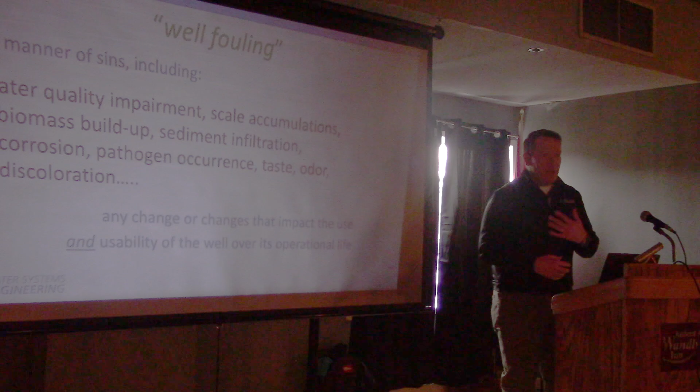So I'm going to talk about well fouling, and I'm going to beat this term up throughout the day, so I thought I would give a little background on what I see as that. I do this because it changes - it's going to mean something different in British Columbia, something different in Kansas, New Jersey, and so forth.

So just so we're all on the same page, it's a water quality impairment. It's scale accumulation, biomass or slime buildup. It's fine sediment that has infiltrated in. It's corrosion, maybe from a stray current or a galvanic cell formed within the well, or even microbial influenced corrosion. It's a pathogen occurrence causing a water quality issue, or an aesthetic issue - which sometimes causes faster problems with the customer than a water quality issue, like taste, odor, or discoloration. So it's anything that impacts the use and usability of the well and the produced water.

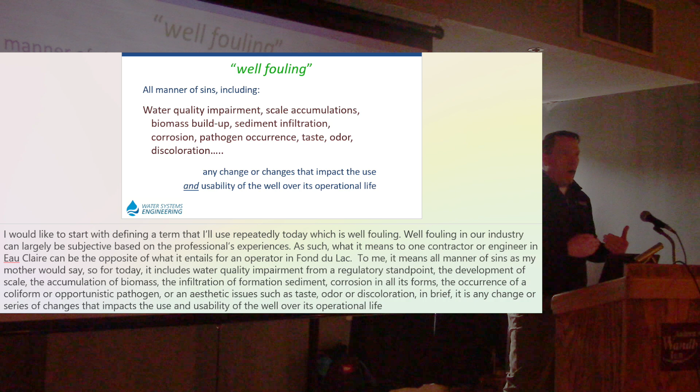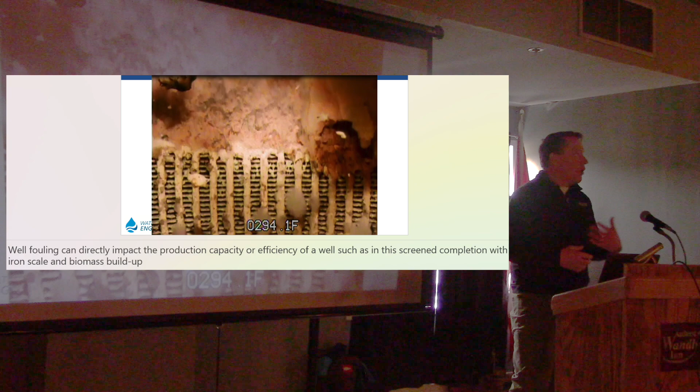And with that basis, I'm going to jump in. It can be biofouling. We've got a severe mix of biologically related fouling and entrained precipitates right above the screen zone, and you can see it's starting to infiltrate into the screen zone there. This presented itself as periodic slough-offs, which would decrease the efficiency of the pump and certainly the quality of the produced water.

This, unfortunately, was a relatively new well, only about 18 months old, that sat out of service while they waited for pump and infrastructure to be built out to it. They got the pump set, turned on the well, and it was just nasty - rotten egg odor, discoloration, very putrid smelling. What had happened is the well had not been fully developed and had turned anaerobic, and sulfate-reducing bacteria had grown up during that time period of sitting stagnant.

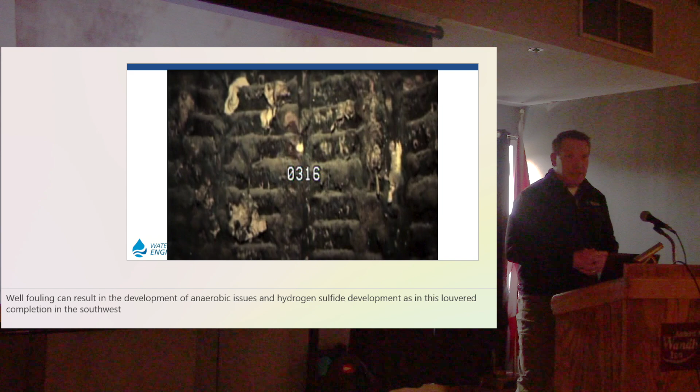There was a hole in the casing, bad enough to cause aeration of the water, but also we were getting formation influence. The operator couldn't maintain a chlorine residual, so we pumped the well a little harder to try to flush things out, and started to get formation material in, causing a little damage to the pump. Fortunately, we decided to run a video before they went any further and discovered this.

One of the most common problems we see is iron bacteria related, and it presents itself with slight increases in your total iron readings. If you've got an iron removal filter, you'll start to see it become less efficient. Periodically, depending on how the well is operated, you'll see a surge of iron-rich water - it might be slightly orange like this, or slightly discolored. In larger well systems, it's generally when we have a pump problem and we pull it, and we can see fine buildup throughout the pump and motor assembly.

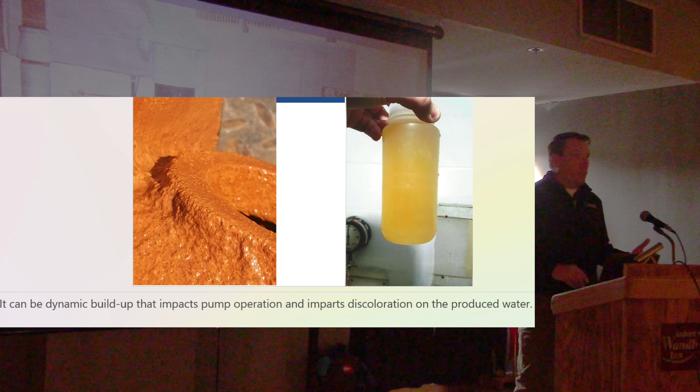My daughter likes to call this one cold brew. This was a large well in Utah, and it was mandated that because of water conservation efforts, they idle this well six months a year. As it does, the anaerobic conditions take over, and you see a lot of manganese mobilized from the formation. When you turn it on, you've got this thick, highly unpleasant water being produced.

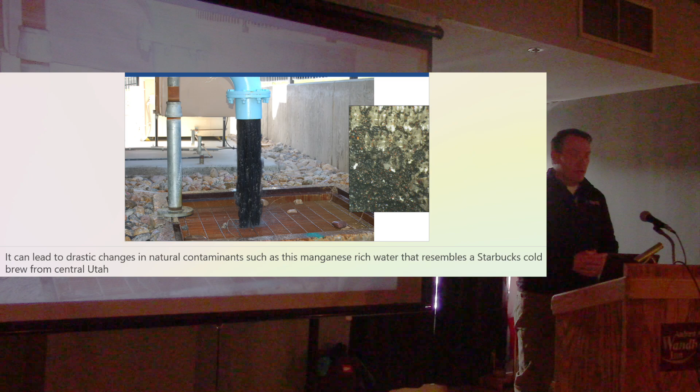The challenge here is how do you clean this and then also educate the customer - you know, your conservation efforts are great, we appreciate that, but we're actually wasting more water to clean this up so we can run it the other six months of the year. So sometimes the solutions are not always a hammer. Sometimes we've got to really sit down and get what I call the whole stakeholder discussion going on.

So I'm going to be talking about testing. And as an industry, when do we test? Well, we test for new well construction.

Part of that is to see if the water is going to be suitable for our uses. And that's going to be different if it's a backyard residential well, a larger municipal well, or a well that's supplying a pharmaceutical or food processing plant.

And also from that, we can get information on the design and construction. Can we utilize mud rotary? Can we utilize low carbon steel or galvanized? Or do we need to look at high strength, low alloy, or PVC, or stainless steel?

Then we can look and see regulatory requirements. And that might be because we just cleaned the well, or we had a storm event and need to prove the well is disinfected in good order, or there may be regional concerns. For example, nitrates - I come from a big ag community, so we're constantly monitoring for nitrates. Other parts of the country and continent, we're looking at arsenic, manganese, or selenium.

And then failure or maintenance concerns. Unfortunately, this is usually post-mortem - we've already reached that point of impingement on operation or water quality. Hopefully, with some of the information you get today, if you start to see problems or you're monitoring a well, you can utilize some of the testing values to identify the problem before it runs to failure.

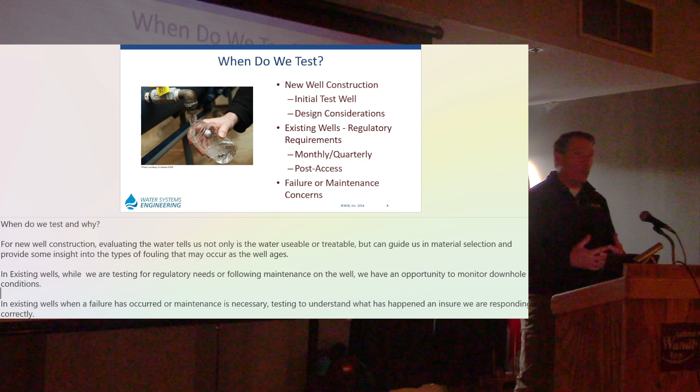So I have a lot of customers - residential, municipal, industrial - saying well, we test enough as it is, how come we didn't find this out? A lot of times it's the same testing methods, but we're looking at it in a different light. Did it reach the maximum contaminant level, the MCL, or is it just starting to build up?

So it's the same type of testing, and not to knock regulatory concerns - with our regulatory guidelines from Health Canada or the Environmental Protection Agency in my country, we've delivered billions of gallons of water at a fraction of the true cost to a largely unappreciative client. So it's gotten us there, but with that same type of testing, we just need to alter it a little bit and utilize that more in looking at well health versus human health, not to get past the human health aspect.

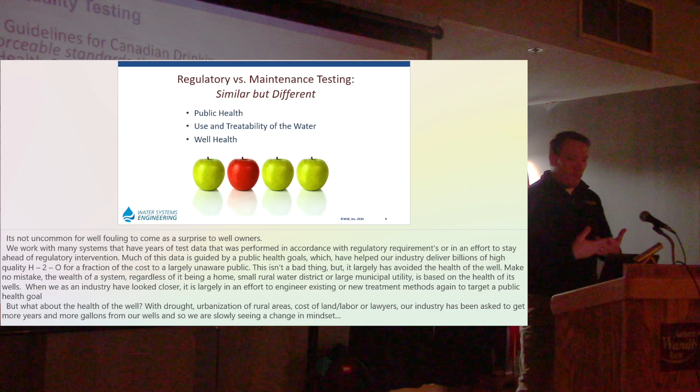So the guidelines for the Canadian Drinking Water Quality are enforceable standards, set through the Federal Provincial Committee as well as the advisory with Health Canada. The regulations are broken up into three main categories: microbiological, chemical and physical, and radiological.

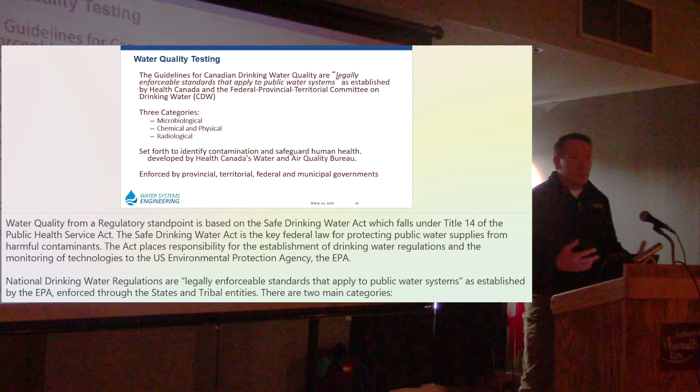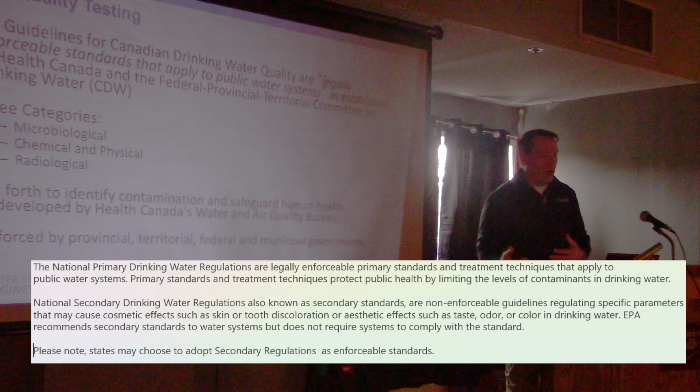Largely, these are set as pretty good sense goals. I know at times, even down south, we'd be grudging - usually these are not just willy-nilly and dropped. For example, the coliform rule came out of a defined need and fatalities that occurred. So it's developing, but understanding where that testing is more practical, that's really where we're at today.

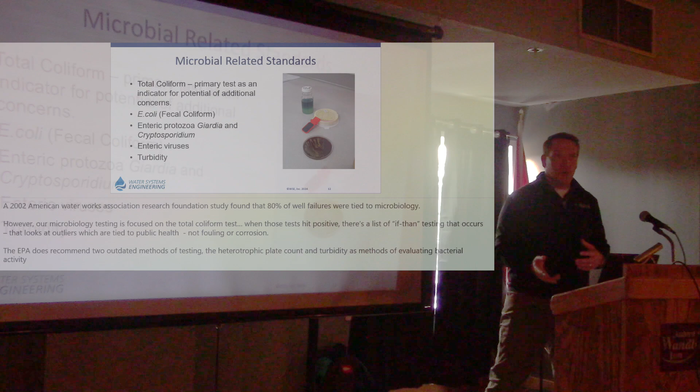On the microbial side, these are pulled out and separated, and the chief one is total coliform, which we're going to talk about in the third section on disinfection - largely it's an indicator of potential contamination, with fecal coliforms called out as a specific pathogenic type bacteria. We also look at enteric protozoa, Giardia and Cryptosporidium, and that's a good differentiation that we're not seeing in the United States, where we look at all protozoa as being bad.

There are a lot of problems there, but a lot of protozoa that are naturally occurring. So understanding they might be part of the recharge or just part of the soil microbiome is a very important consideration that I see here in Canada.

Enteric viruses - as an industry, we're still trying to understand the flow and activation of viruses in the subsurface. Then turbidity, again, as an indicator of problems. Total organic carbon is a good influence on that, but also if we've got a lot of root traces or biomass evacuated from the well system, that will trip our turbidity.

So again, it's this balance, working within those. Don't use them as an endpoint, but use them as a guideline. I'm going to talk about these in greater depth, but if we're evaluating something like total dissolved solids, ORP, manganese level, or iron level, it's the subtle changes over time that indicate a problem is occurring downhole. Maybe that's corrosion, maybe it's mineral scale buildup.

On the biological side, tracking that population ahead of reaching a coliform is very important. And then we can schedule the equipment we need, the chemicals we need if necessary, and work with the client. Maybe it's a budget issue, coming up with the money, or maybe they need to find an alternate water source. But it puts us in the driver's seat in addressing these problems.

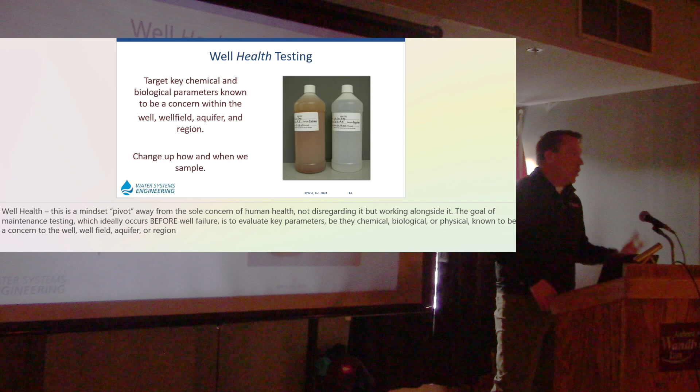But turning it on, if it's sat idle overnight, completely discoloration, completely different biological and chemical parameters. And that really told us what we needed to do as far as brushing, as far as how to chlorinate the well properly, and really put us in the driver's seat for decision making.

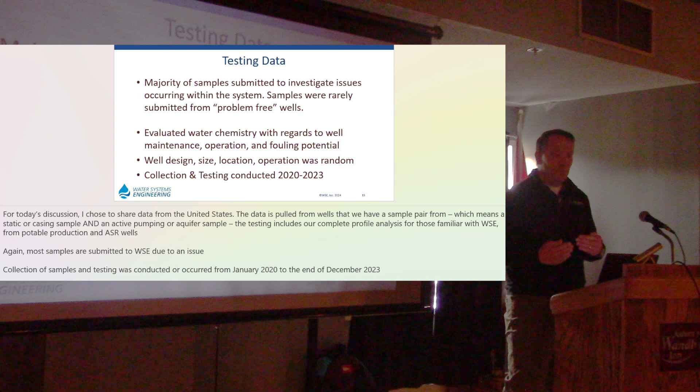So the information I'm going to present was over the time period of 2020 to 2023. It's roughly 2,000 potable well pairs. We had the static sample and then the active pumping sample. Again, we're looking at well health here. None of them were, hey, we're just sending in a sample for baseline analysis - people were only coming to us with a problem. So this is completely random as far as size, shape, completion method, materials used.

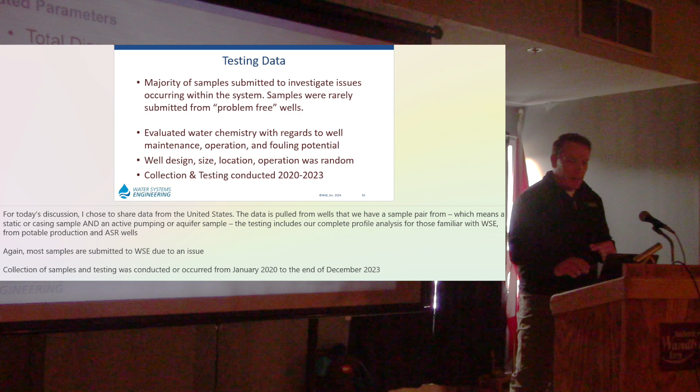These are the parameters we looked at: total dissolved solids, alkalinity, hardness, manganese, iron, corrosion potential, total organic carbon - that was our water chemistry. Iron bacteria, population census, and biodiversity was our biological side.

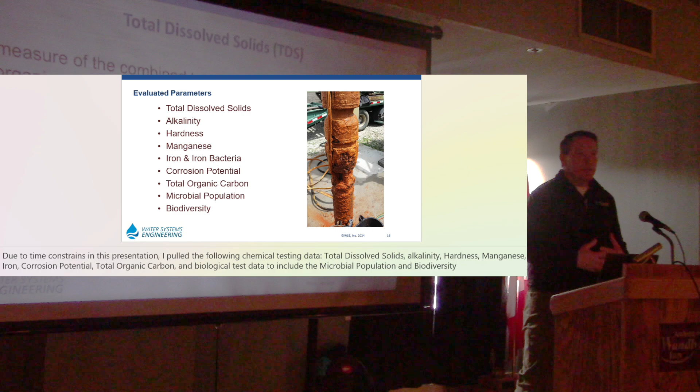Total dissolved solids is a very easy parameter, can be run in the field. It's a measure of the combined total of inorganic and organic materials in that water. Typically, the higher the TDS level, the higher visual turbidity is present. So this lightly foggy type look is an indication that we're almost at the point of saturation with regards to a mineralized water.

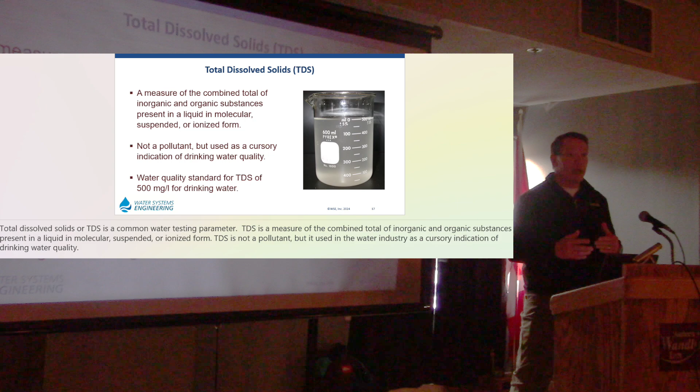This isn't a pollutant, but it is a parameter that both Health Canada and US EPA evaluate for general standards. Typically, we look at trying to be below 500 parts per million. Once we're above 500 parts per million, generally we see some taste impactions, greater potential for scale buildup. If it's even higher, upwards of 1,000, we can have some physical corrosion occurring.

This is a good indication of a well where TDS had started to climb pretty significantly over background levels - 30 to 40% greater, in fact. In the downhole video here, this cloudy snowstorm is a whole mix of solids precipitating out of solution, some colloidal biomass. We even had some fine silts and clays that were infiltrating as the pump was operating into the borehole.

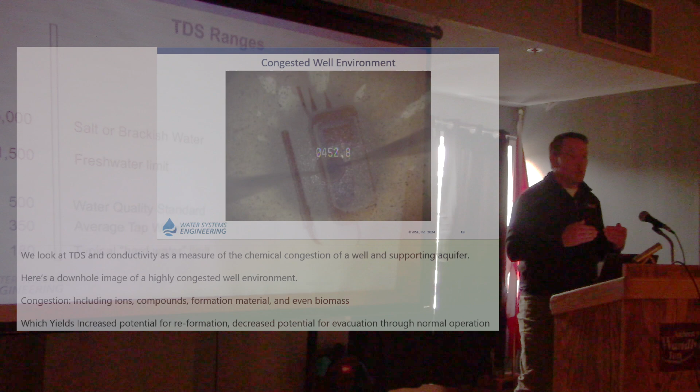Generally on TDS, we look at about 180 parts per million as our hard water limit. Below that, we consider it softer and generally more aggressive, but above 180, there's sufficient calcium, magnesium, and other dissolved constituents for scale to form.

Average tap water across the continent is about 350. By the time different water sources have been blended and treated, they may have added coagulants for corrosion control, or in the States they add fluoride, so generally it's heading out to distribution systems around 350 parts per million.

Typical water quality treatment standard is 500. The freshwater limit, where we move into true brackish, highly congested waters, is 1,500. Kind of an odd point of interest: dogs, particularly water dogs like golden retrievers and Labrador retrievers, will turn their nose up at about 900. Cattle at about 1,100. Humans about 1,200, so who's smarter here? Dog. We get into that real salty saline taste at about 5,000.

I wanted to throw these in too, and we'll talk about it more when we get into cleaning, but just mechanical cleaning of a fouled well, running in with a brush or a swab and working it up a little, you'll see TDS, or conductivity, which is a function of TDS, spike upwards of 30,000 parts per million, and you can visually see that turbidity. I call this out because if you want to confirm you've fully flushed a well out, whether existing or new, and want to make sure you've developed it, look at where your TDS or conductivity is. That'll give you a good indicator you've flushed all that material out.

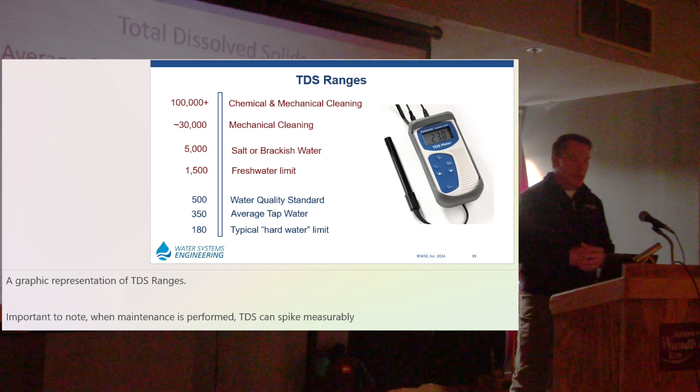Our average was 960 parts per million, fairly hard across those 2,000 sample sets. The highest we saw was in central Texas, where you've got a lot of karst topography, so a lot of limestone that's dissolved naturally and carries that hardness into the wellbore. The lowest was in the Carolinas, very soft, sodium-rich water. As a side note, that water is usually fairly aggressive naturally, so it's going to scavenge a lot of available iron, both from the aquifer and the well structure.

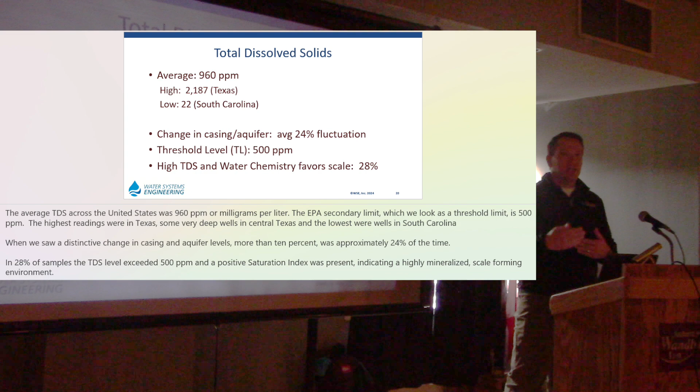Where we saw a change between the casing and the aquifer, average 24% fluctuation, fairly considerable. People typically reach out when the well's having problems, and when we see that buildup there, a decline by 24% suggests to me a good chance for scale buildup in those wells - high total dissolved solids and a water chemistry that favors scale. When we've got a saturation index or corrosion index in a positive scale-forming environment, that's 28% of the time.

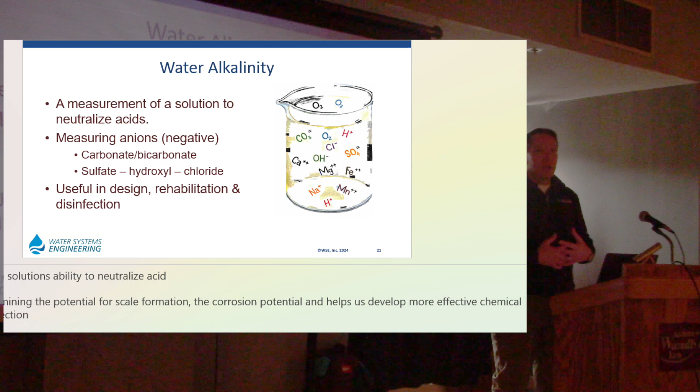Alkalinity is one of those parameters we forget about a lot. We run it in water quality because we need to identify it, but it plays into a lot of things. On the well design aspect, we use that alkalinity to figure out our stability index - how corrosive is that water chemistry. When we go to chlorinate a well, the alkalinity can provide buffering that limits the effectiveness of chlorine.

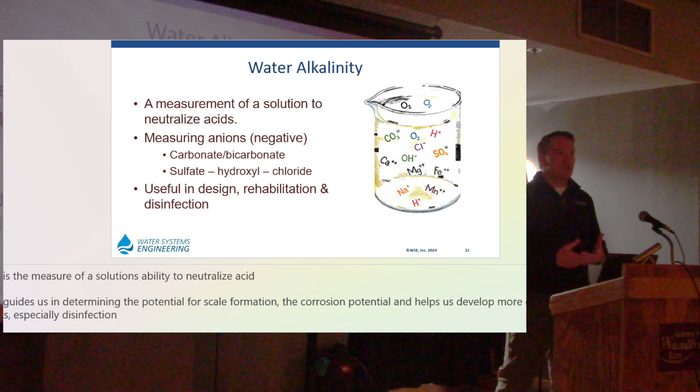Or if we're acidizing the well, if there's high alkalinity present, it can rapidly buffer and consume that acid, so we end up needing more acid to digest the mineral scale. It primarily comes from carbonate and bicarbonate presence within the aquifer, although in some cases we have a little more negative aspect present. We use this in a lot of parameters in well maintenance.

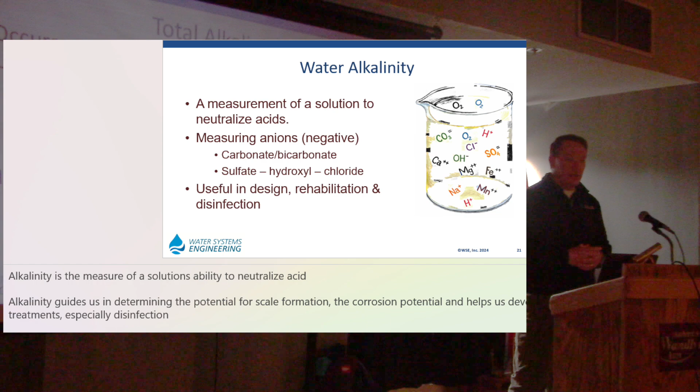Our highest occurrence was in the coastal influences in the Carolinas, 476 parts per million. Just for reference, if you put calcium or sodium hypochlorite into the well at that level, it's not going to dissolve - it stays solid because there's just that much buffering capability. You typically need a lot more acid to clean a well in that area because the water is naturally neutralizing it. Our lowest was in central Georgia, near the kaolin mines.

Again, that's where we saw the lower levels of total dissolved solids and some of our most aggressive water - on average, 124 parts per million. Once we get above 100 with total alkalinity, we can start to see its influences. If we get up to 200, it's doubled; 300, it's tripled; 400, quadrupled. So its impact is right in line with its scale, hitting both our materials investigation and our treatment.

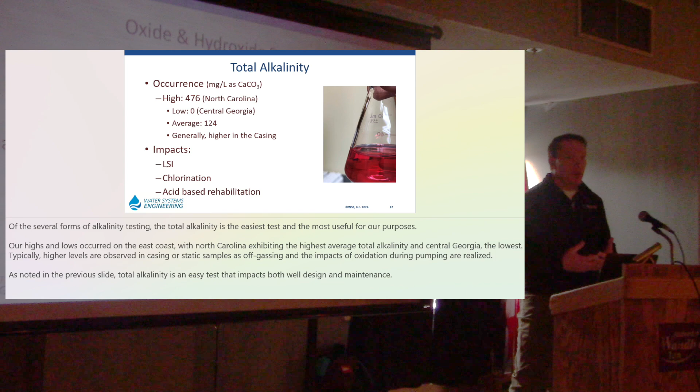Oxides and hydroxides are really the most common scales we see in well systems, predominantly iron oxide. Iron is abundant in the Earth's crust and our shallow subsurface, and a lot of our well structure is iron or iron-based. So that is one of the reasons we see a lot of it built up in well systems.

With shallow well systems, there's a lot of organically generated manganese, and also a lot of iron bacteria. So it kind of amplifies that buildup of iron and manganese scale.

Generally, we need greater than a part per million iron. Manganese is at one-tenth of a part per million. So they're very similar elements, and they behave very similar, especially in oxidative environments, but you need far less manganese to build up that scale. And manganese scale is a lot harder to break down and evacuate from the well.

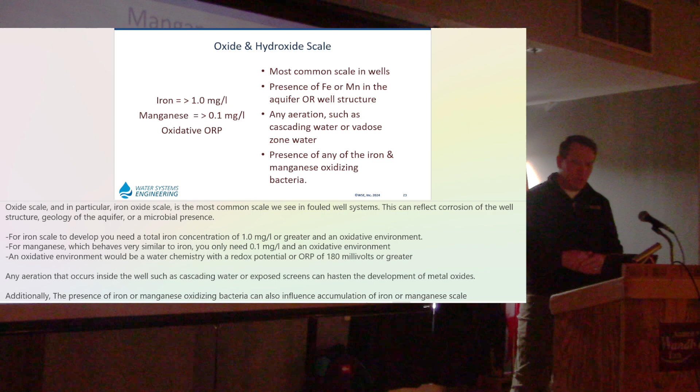On the manganese side, the highest we saw was 2.3 in Montana, which is the reason they call it the mineral state. On average it was 0.51, so on average we were exceeding that one-tenth of a part per million by 5 times. Low, it wasn't uncommon to find 0, but generally there were other problems present. As I mentioned, the scale threshold is one-tenth of a part per million.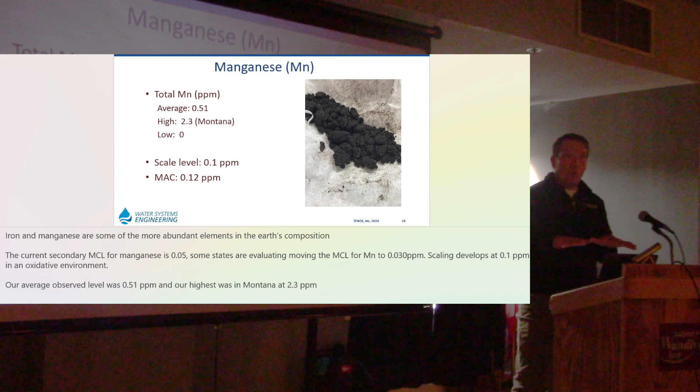The water quality standard in Canada is 0.12, so right in line with that scale formation. Once you're starting to form scale, you're impeding your water quality.

On the iron side, the water quality standard is 0.3 parts per million, so we're going to catch it before it becomes a scale formation. In that 2,000 sample set, the average was 1.89 for total dissolved and suspended, and our highest was again in Montana at 3.14.

The resuspended iron test is a total iron test that also accounts for the biologically mobilized or entrained iron and manganese. Average was 7.54, highest was 205 in central Utah.

And those numbers generally spike in areas where we've got a lot of iron bacteria, a lot of rapid recharge of the aquifer, a lot of steel present. Our iron bacteria rate of occurrence at this particular sample set was 46.4%. Generally in a given year it ranges between 45 and 50%, so this is kind of right on par in the middle there.

Water hardness, the mineral content of the water, is a combined total of calcium and magnesium, typically expressed as calcium carbonate, so you're likely forming species there. Not a regulatory issue, but as you see in this piping section here, in a lot of the wells in hard water areas, it's a very common scale forming mechanism.

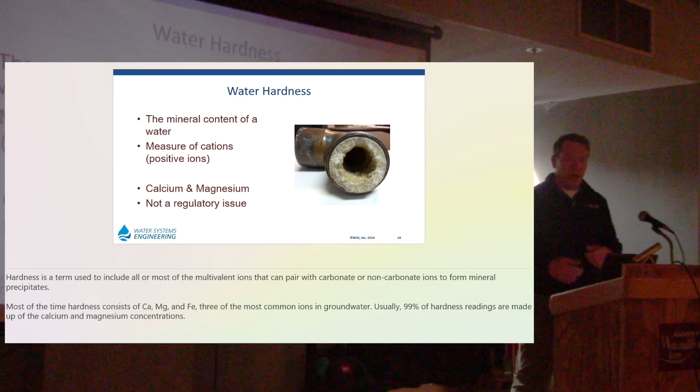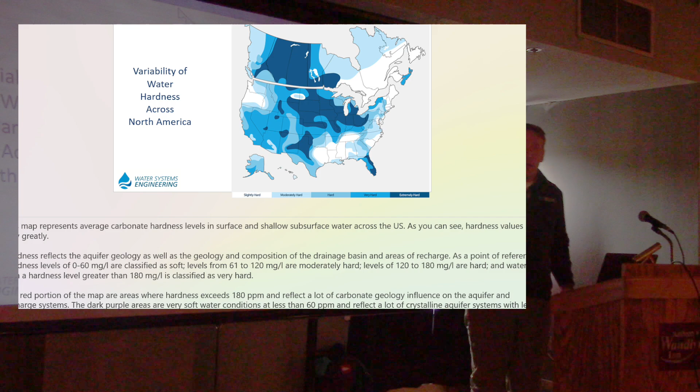Water hardness differs across the continent. The white areas here are areas where we have generally soft water, below 60 parts per million. Then we go all the way to the dark areas, which are where we're above that 180 parts per million hard water limit. You kind of look, it follows the Rockies right down to the Nemaha uplift and spreads out into the Texas area, but that's where you've got a lot of limestone, a lot of dolomite, so a lot of calcium and magnesium present.

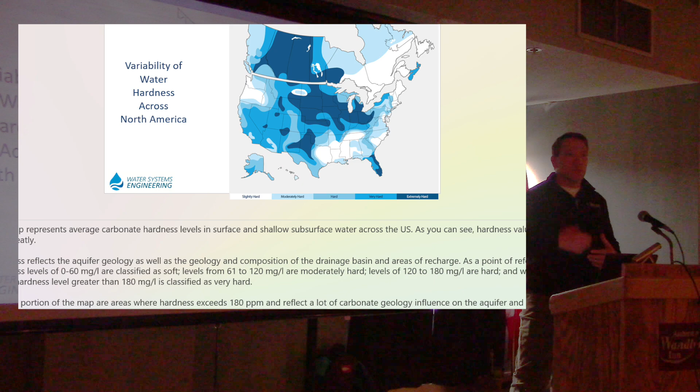These pockets of white, like I said, the soft water areas, that's generally where you either have crystalline fractured rock aquifers or some basalt lava flows, generally softer water. That's typically more aggressive, and generally there are a lot more iron and manganese issues in those areas, whereas calcium and magnesium dominate where the dark blue areas are.

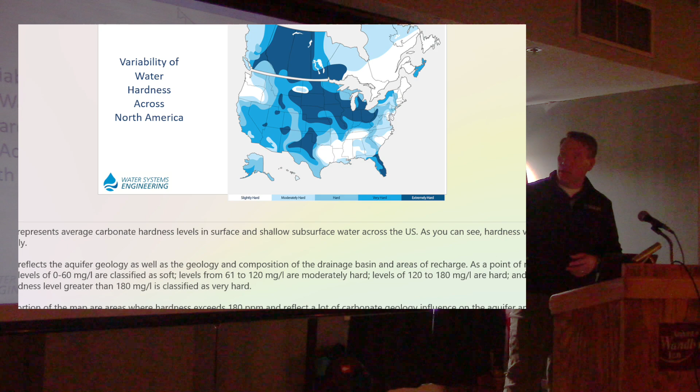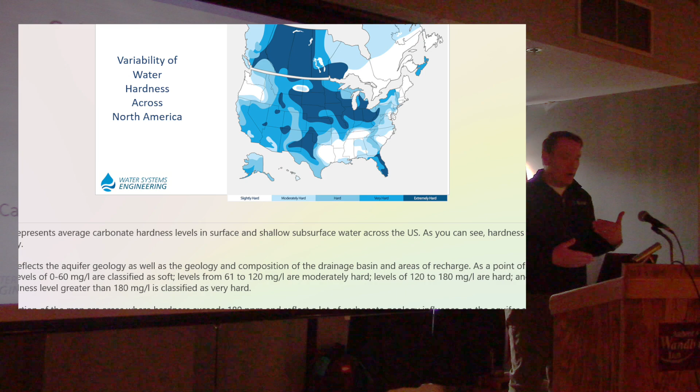With calcium, we need a neutral water chemistry, so 7 or higher on the pH scale. Alkalinity, 150 parts per million, so there's sufficient buffering capability. Hardness, it's got to be a hard water. Our LSI, our Langelier Saturation Index, needs to be positive or saturated with respect to calcium, and then we need to have some calcium present.

In this particular well here, where this column pipe came from, this is in a very geothermal active area. They've got all the attributes: calcium is present, I think the base pH is 8.3, but the temperature is just below 100 degrees Fahrenheit.

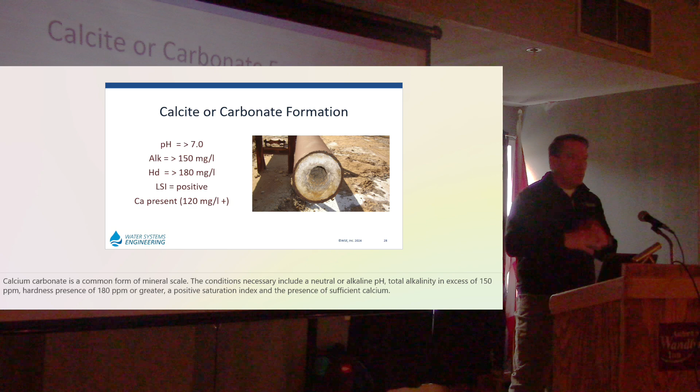You practically see steam coming out of the well when it's pumping, and they're swapping these out roughly about every 2 years because the scale buildup is so significant.

Average calcium was 183 parts per million, so on average we were dealing with hard water cases. Our highest was in central Utah, and you're probably starting to see a trend here that central Utah has a lot of problems with regards to wells, at 1,700 parts per million. You turn on the faucet and it's chunky, kind of like a sea salt grater.

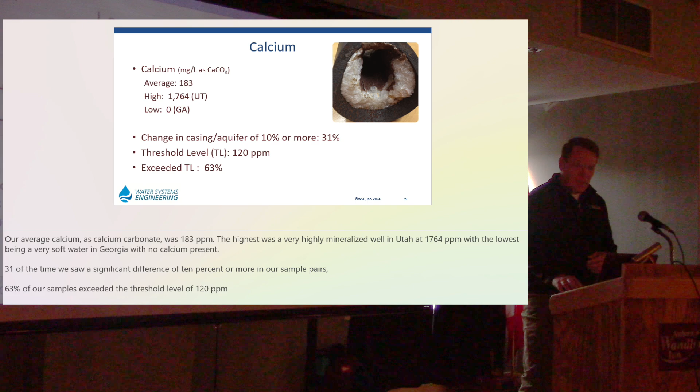Where we exceeded that 120 parts per million threshold needed for scale, it occurred 63% of the time. I talked about it in a few slides: the Langelier Saturation Index. It's a logarithmic calculation that tells us the potential of either corrosion or scale formation downhole. It was originally developed in the boiler industry in the '30s, and there have been a couple revisions to it over the years: the Ryznar Stability Index, the Puckorius Index, the Larson-Skold Index. But the Langelier is really the grandfather of them all, and tends to be pretty spot on in giving us guidelines.

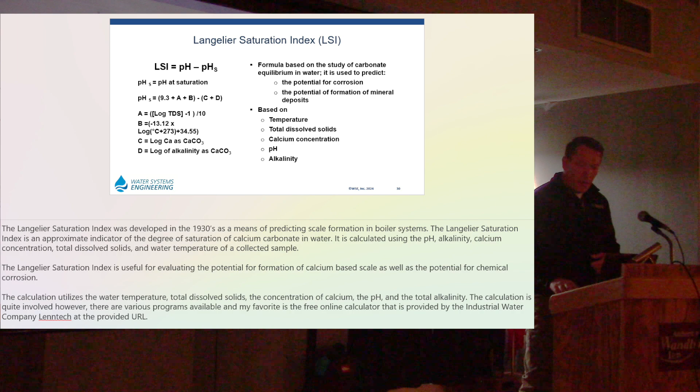We use a lot of standard water quality parameters: pH, total alkalinity, total dissolved solids, calcium content. What it gives us is a number between -7 and +7. The negative values are more aggressive, more prone to corrosion, especially of more reactive materials like low carbon steel, galvanized steel that's got a nick in it, or poorly coated steels. The positive is more scale forming, a more saturated environment. So when we've got a positive number on a new well, we know we're going to be rehabilitating that well periodically and using acid, so we try and factor that in.

When we've got a negative side, we're going to look at less reactive materials, maybe a PVC stainless steel hybrid, or PVC top to bottom, or stainless steel top to bottom, depending on the customer's needs.

Lowest was in East Texas at -4.39. They put in real thick wall steel because they just assume they're going to be losing it, and conversely, they're doing a lot of iron removal from those wells. Highest was 1.67 in Southern California - typically warmer water, highly mineralized, a lot of buffering potential with alkalinity, knocking on the door of around 300 in that area.

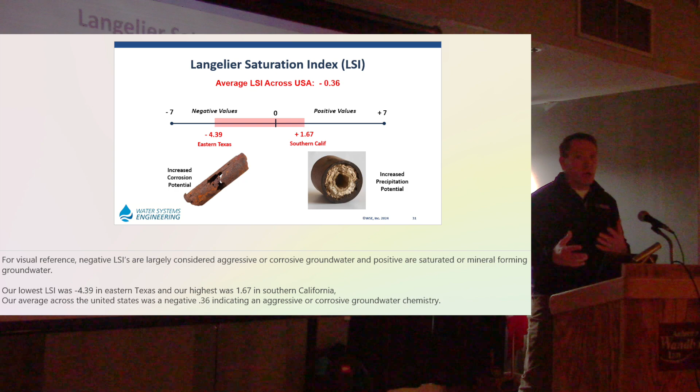Our average across the United States is -0.36. So on average, more aggressive - and I'm honestly saying more aggressive than we designed for.

Anyone happen to read about the Flint debacle that occurred in 2016? Briefly, what happened in Flint, Michigan is they changed the water source. Both sources were surface water, but the new water source was more aggressive. No one thought to look at the water chemistry - they just made sure they could treat it, but didn't look at how aggressive that water was. Switching to a more aggressive water, they had a lot of failure points at old connections, moved a lot of lead that was still in the system, and so there was a lot of contamination from that event.

Well, after that, the USGS, which is charged with monitoring groundwater quality in the United States, went through their records. They maintain water level measuring wells on national parks and federal properties, and they also maintain the private well owner network, which is purely volunteer. So not a complete data set, but really the first time anyone looked at water quality across the United States from a corrosion standpoint, and they evaluated the LSI, that calculation I just showed you.

What they found was that corrosion was indicated in 50% or greater of the wells. This kind of explained to me why we see so much iron in our well systems. But I can tell you that a lot of our wells were not designed with that in mind, and so we've got longevity issues.

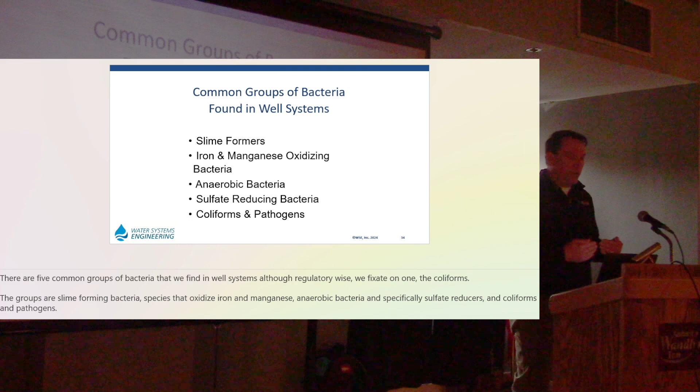Bacteria-wise, some of the ones we look at, because they're common problems we see in wells, are slime formers, iron and manganese oxidizers, anaerobic growth - and specific within the anaerobic community, sulfate reducers - and then coliforms and pathogens from a direct human health aspect.

The 5 most common species we identified: Gallionella, an iron bacteria; Pseudomonas and Bacillus, some of the most prolific slime-forming bacteria on the planet; Acidovorax, a soil microbe; and Acinetobacter, another soil bacteria, common in recharge environments.

Iron bacteria derive their energy from iron. They secrete a little bit of acid to digest the metal and then consume that iron. If you pull that organism away, you'll find a very small pit. If allowed to continue munching on that iron, that pit will grow, as will the bacteria itself and the bacteria's waste stream - this chain of sausages, which is an iron oxyhydroxide, a very sticky, slimy form of iron.

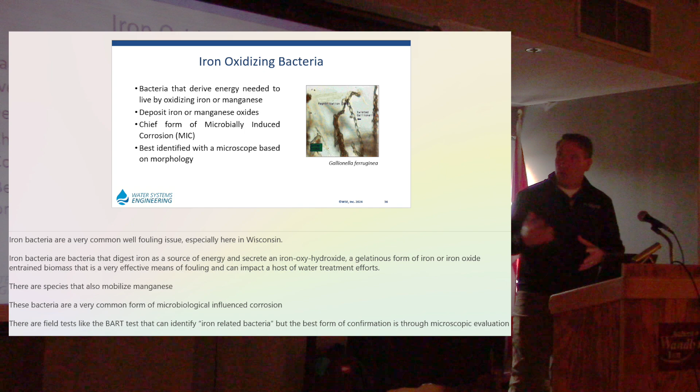It will come out bright red. As it dies off, it starts to go to a reddish brown and then to brown. I've seen these as long as 3 feet, or close to 1 meter, in a very heavily infested well system. They are the most active agent of microbially induced corrosion.

It's not just the pit they form, because even stainless steel, which has a lot of passivation and protection against corrosive environments, gets broken down. You'll see the point of attack with that pit, but the acid attack will depassivate an area around it, so that steel is that much more vulnerable moving forward. Low carbon steel, HSLA, and stainless steel alloys are all vulnerable to that.

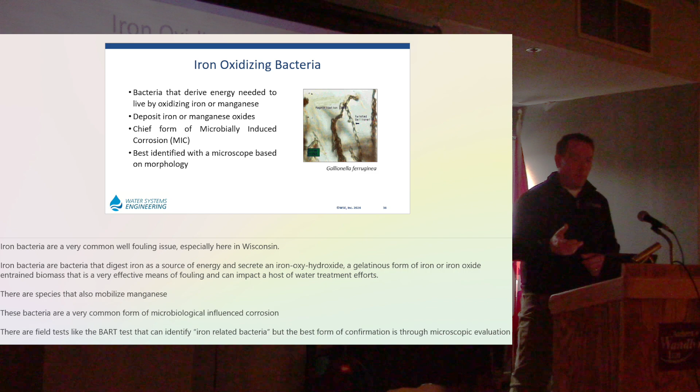There are some tests. The BART, Biological Activity Reaction Test, will confirm the presence or absence and general growth range of iron bacteria. The best way we've found is confirming it under the microscope and getting an assessment of what type of growth has occurred - is it pretty pronounced, or are we just in the early stages?

Between 2020 and 2023, our occurrence rate was 46%, so fairly significant. Iron bacteria - 75% of those we identified were Gallionella. There's a lot of bad press around Gallionella; a lot of people think the contractor introduced it into their well. The fact is, it's a soil bacteria, common in rapid recharge areas, and it's going to be natural to that aquifer.

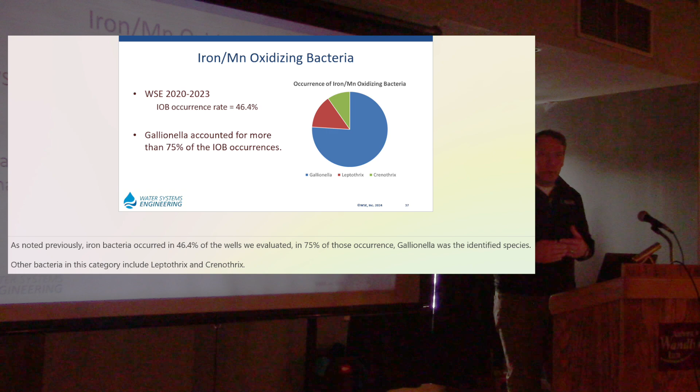In drilling that well, we've added a little bit of heat with the drill bit, we've added oxygen, we've mixed up a bunch of water chemistries, and in some cases put steel in there. So we've created a perfect environment for the iron bacteria to awaken and start to consume. It's naturally occurring, not introduced - we've just created that perfect environment for them to propagate.

Sulfate reducing bacteria - this is an anaerobic growth, a bacteria that lives in a low oxygen or oxygen depleted area. So if we've got a sand trap or a blank space at the bottom of the well system, or a real tight formation where we've maximized our screen but are only getting maybe 3-5% flow out of the bottom area, we'll see it down there. If we've got an area of poor development where we're not getting flow, we'll see our anaerobes start to prosper.

This particular bacteria reduces sulfates or sulfites to sulfides, and in doing so, it releases hydrogen sulfide gas. Locally, in the water column, it can drop the pH by as much as 1.5 from normal, turning neutral water into corrosive water pretty quick.

Generally what we detect - and more so before COVID, because a human nose could pick up a tenth of a part per billion of hydrogen sulfide - we'll catch the odor as that gas moves up the column. Especially if the well's been idle, you turn it on and get a rotten egg odor right away that starts to dissipate. That's a solid indicator you've got SRBs downhole.

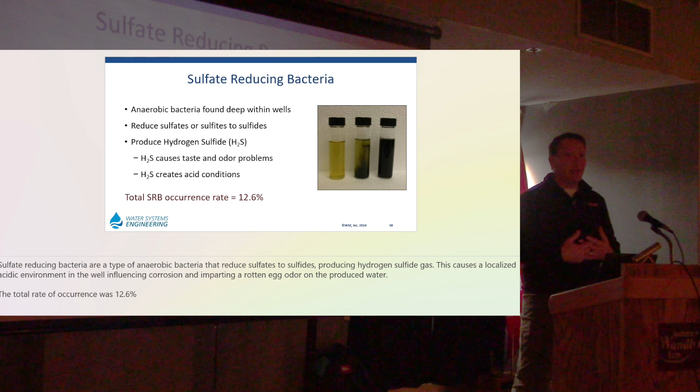The occurrence rate was only 12.6%. Some areas it's been higher, other years lower, but it's not an uncommon issue, though not the most common. More often than not, there'll be a wisp of it, telling us we've got fouling occurring. It hasn't maybe graduated to SRB levels yet, but it's already developing.

Coliform bacteria - we'll get into these in the last session of the day a little bit more - is the industry standard in Canada and the United States for water quality. It's a very easy, very cheap, very efficient test. It can pick up 1 in 4 billion, so it's very adept at identifying coliforms.

There are bacteria that can trip it. If you've got a very heavy load of bacteria in general, that can throw off the test. There are some slime formers like Aeromonas that can trip the test. So if you've got a coliform bacteria, ask, is it a fecal coliform? And if you can, get a count to identify what the true problem is.

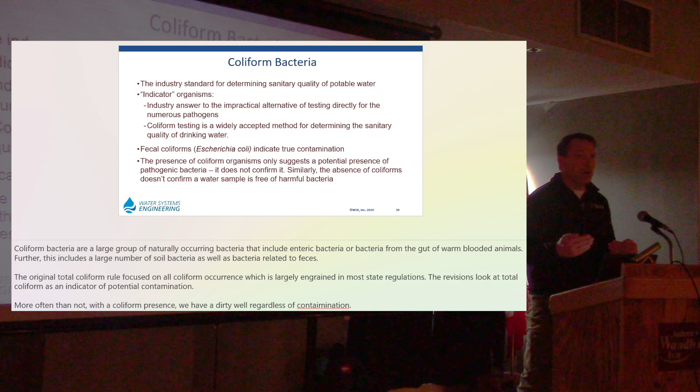But we use it as an indicator. More often than not, when we are finding coliforms in a well, the well has either been out of service for a couple of years, or it's just heavily fouled and we've reached that point of evolution, if I may.

This is coliform occurrence versus anaerobic growth. Anaerobic growth is reported as a percentage of the total population. At 10%, 15%, we generally don't get too concerned, but when we start to see greater than 20% in a well, we know we've got a pretty advanced level of fouling, or we've got a dead zone in that well where flow's not going through.

At 10% or less, our coliform occurrence was pretty low, less than 2%. As we climbed to 15%, our occurrence was at 25%, and at 30% or greater, almost 50% of the time. So generally when we're at 40%, not only do we have coliforms, more than likely we're going to have sulfate reducers and a lot of other issues, generally some mechanical fouling downhole as well.

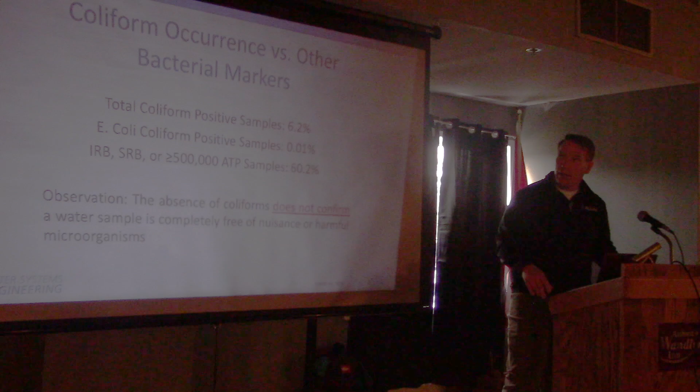Coliform occurrence versus others: in that 2,000 sample set, coliforms occurred 6% of the time, E. coli occurred 1/100th of a percent, so very rare. But the occurrence of either iron bacteria, sulfate reducing bacteria, or a very high population load was 60% of the time.

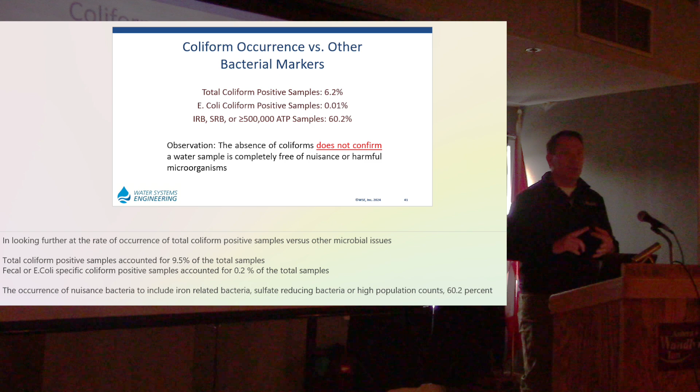This is a good indicator. I'll have clients with wells of all shapes and sizes, well fields that are similar, say, 'Well, I've been testing and I don't have any bacteria.' Well, you've just been testing for coliform, and you're lucky - you don't have any of those indicators. But you could be having iron bacteria, you could be having SRBs, you could be having an excessive level of bacterial growth. An ATP of 500,000 is about 5 times the fouling threshold.

So with testing, this change is a mindset change. It's explaining to our customers, to our coworkers and within the industry: hey, our health standards are great, but we can't use those because that's an endpoint for our well systems. We can use a lot of the same test methods, maybe look at them a little more frequently, start to compile the data, look at the differences - not just crossing a threshold level, but seeing how it's building up. Or if it's not, that's okay too.

Regular testing - people will ask, well, do I need to test every month? You need to tell me, what role does that one well play to you? Is it part of 10 and you can pivot to use another water source? If that's the case, maybe you test every 2 years. If that's your only well system, you want to test more frequently. And if it's prone to problems, and those problems are expensive, test even more frequently.

The host of issues here that I've looked at and the parameters - we're talking less than $100 for testing. So it's not a very expensive deal, and it catches you ahead of time. Then you can schedule your maintenance efforts or the materials that you'll need.

Look at how we're collecting the samples. Again, if you're really trying to investigate, I advocate looking at a static sample and an active pumping sample and comparing those results. If you get to that point and want some insight, feel free to reach out to me.

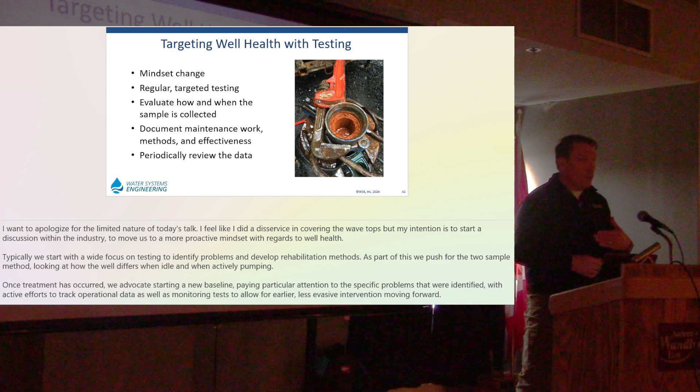Let's break that out. Maybe it's just once a year, but let's look at those changes that occur. Again, catching them early lets us react a lot more effectively. It's going to improve the lifespan of the well a lot better when we're not just running to failure on a cycle. The same goes for pump systems.

So this is our first scheduled break. I'll leave some time here for questions with regards to testing. The next session gets into chemicals and well maintenance, and the following one after that is disinfection and the coliform test, and a little further in depth on biological testing.

Questions today? I'm open for that, but also this is my email address and my office number. As I mentioned, feel free to reach out, more than happy to give you some guidance. I've written a number of articles for Water Well Journal and for a lot of the state associations on the phenomena that we'll talk about today, so I'm more than happy to share that information with you. So, questions?

Okay, I think it's a little bit over most of our heads. That's my own fault. No, fair. It is. There's the lab people, myself included, who don't always get to share this information.

So it's a lot more than we as an industry look for. But I think we're getting to that point where people are asking more of us, and at least in Kansas and in my backyard, there are fewer of us doing it. So the joke a couple of us have is the easy water's gone, the easy projects are gone. We're getting more challenges, and we're having to look a lot deeper, no pun intended, trying to understand why these failures are occurring.